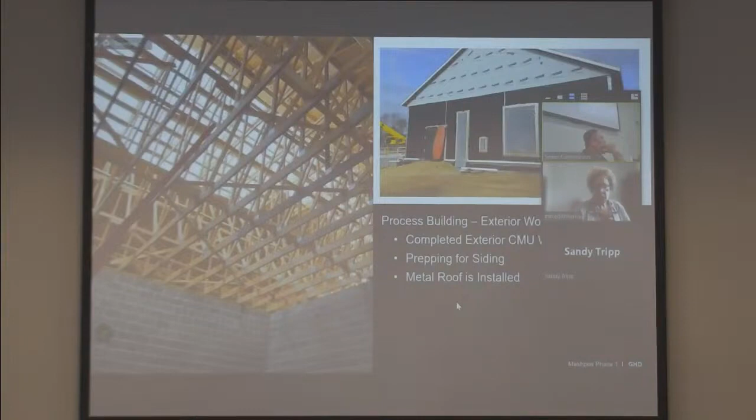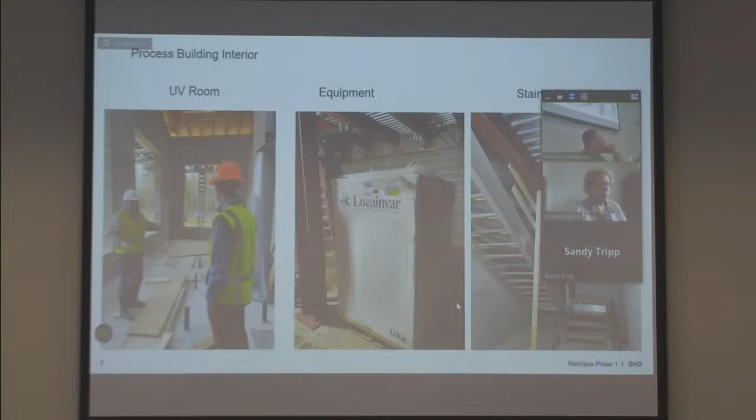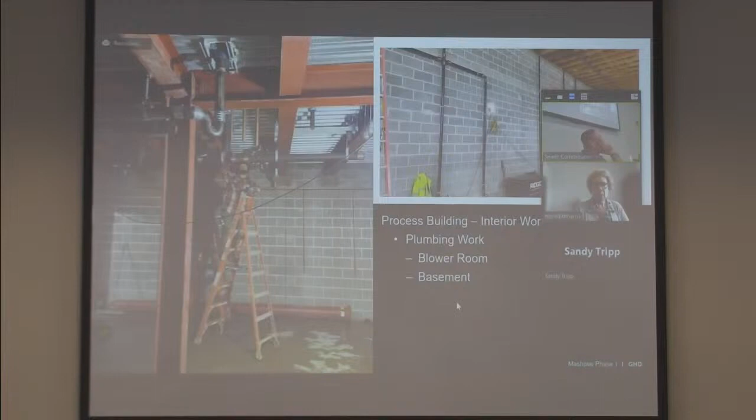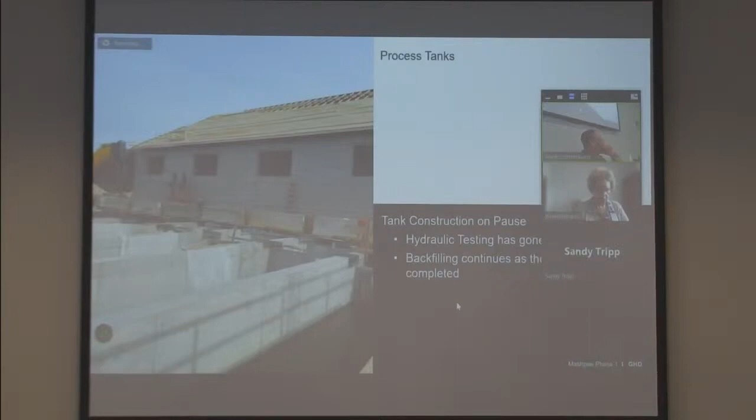The process tanks, not a lot of concrete work. They're pretty much done with concrete, but they've been continuing their hydraulic testing of the structures. And then as the structures are successfully tested, they're backfilled. So if you go out there from week to week, you'll see that the ground level is rising, that we're actually getting the site to grade.

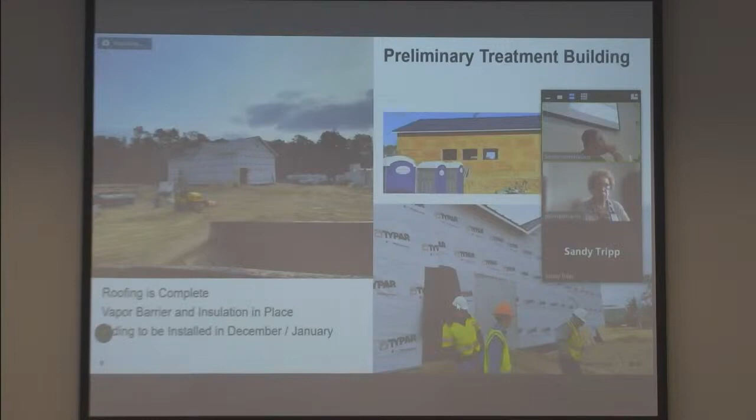For the preliminary treatment building, the roofing is complete, the vapor barrier and insulation is complete, siding will be installed probably in both buildings in December and January, so you'll have a cedar shingle type look to your buildings. It's HardiePlank, but they're constructed to look like your cedar shingles.

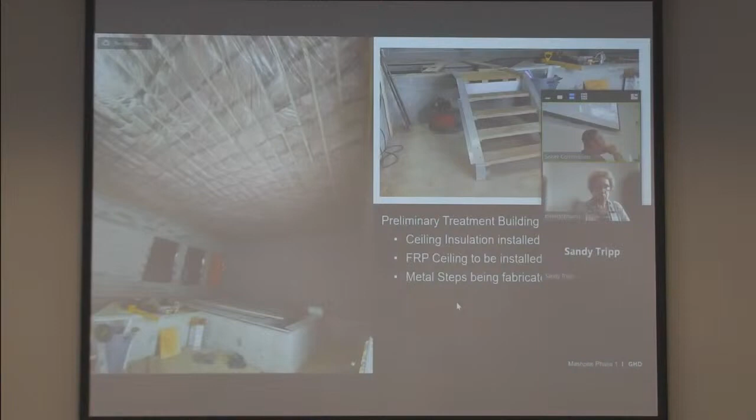Inside, the ceiling, you can see the ceiling insulation is installed, and they're going to be beginning to put this ceiling will be an FRP ceiling, so it's a plywood ceiling that's got an FRP skin on it, because this building of them all is probably the most corrosive. It carries raw wastewater and the sewer gases. Although it's ventilated, we want to protect your building.

And again, metal steps are being fabricated. They put the wooden planks down so that you can actually use them because the treads aren't in yet.

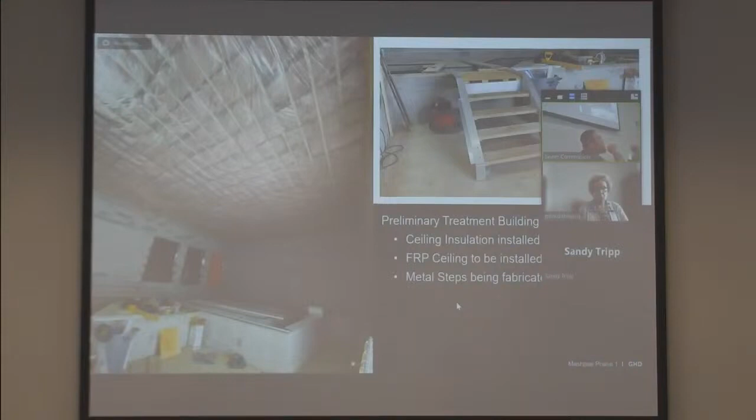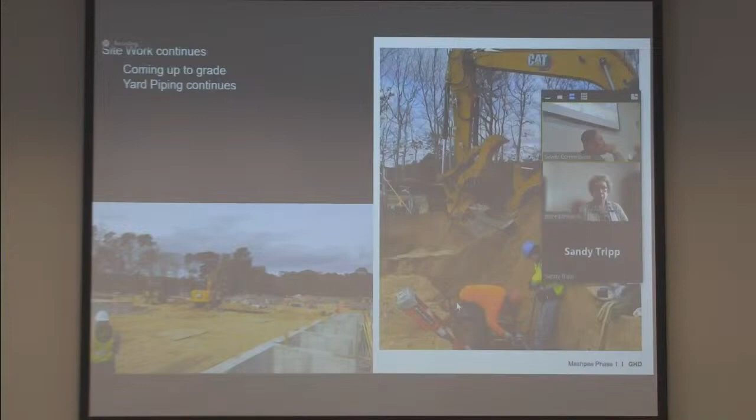For the collection system north, in October they were doing miscellaneous testing, but did no major work in November. In fact, we did not receive an application for payment from Robert B. Our in November, so they're pretty much done with this project until the spring.

For the north project, this is the one with the pumping stations. They're not planning any work. I'm sorry, no, this is still the north project, not the pump station one. The Sea Oaks is on hold for now. They'll be starting High Sachem Road paving in the spring, and same thing with Asher's Path. They may start that in January.

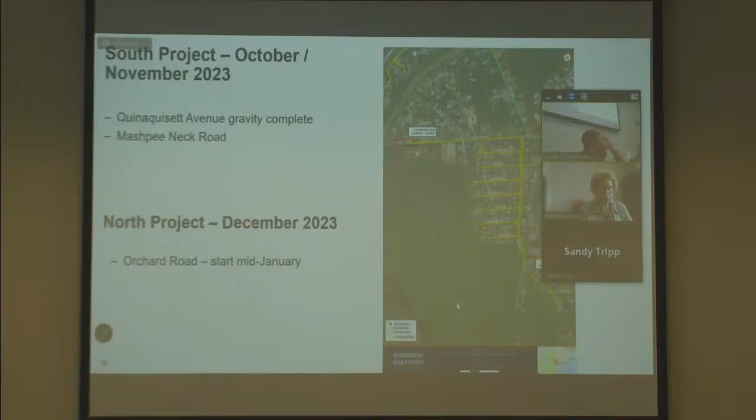Here's the south system with the pump stations. In October and into November, they were completing the Quinaquisett Avenue gravity sewer system and Mashpee Neck Road. What's coming up next linear-wise is Orchard Road, which will probably start in mid-January and take about 6 to 8 weeks to construct.

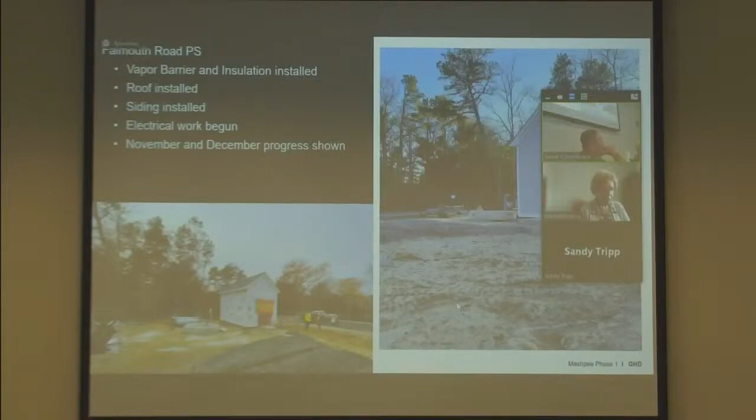This is Mashpee Neck Road, similar. On the right is what the station looked like a month ago, and on the left is what was in place yesterday. You can see the cedar shingle siding and some of the trim work. The siding's not complete yet — they had to return some damaged siding, so it'll get buttoned up in the next couple weeks.

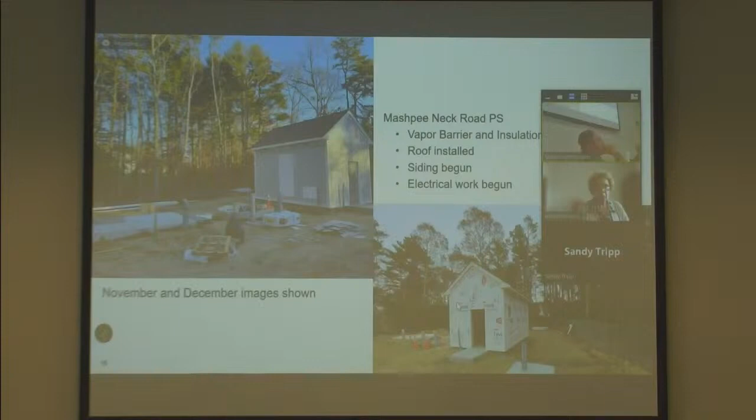So where are we on progress and cash flow? Starting with the plant itself, we are about 423 days into a 790-day contract, so we're over 50% time-wise, about 41% spent.

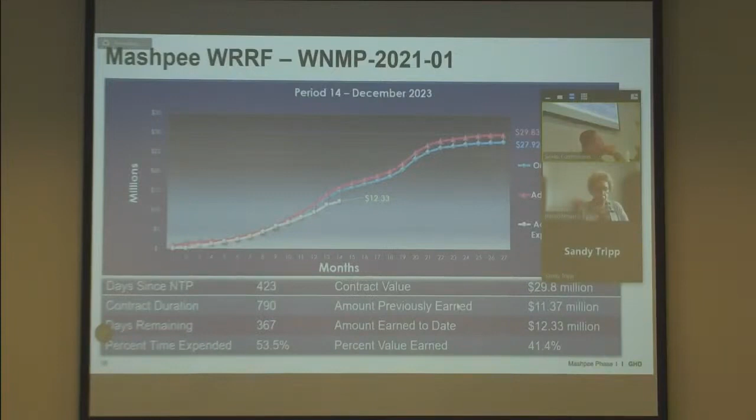Any questions on the cash flow? On the North project, they haven't processed any change orders yet. The contract value is $5.2 million. This is a shorter time frame project — we're 423 days into a 679-day project, or about 62% complete. They are much further along in their actual work, though. The flatness in the white line is due to the fact that they haven't done a lot of work in the last month, so they didn't invoice last month. And to be honest, I'm missing one invoice for November, which I'll correct next month.

Any questions on this one? Okay.

And this is the south project, the one with the pump stations. This has the same time frame as the treatment plant, 790 days, so they too are 54% along in time. They're about 66% complete in billings, and you'll see this number keep going up as they're building the pump stations and start getting equipment in. Their linear work is well in hand, but this is what we expected for the pump stations to be built in this time frame.